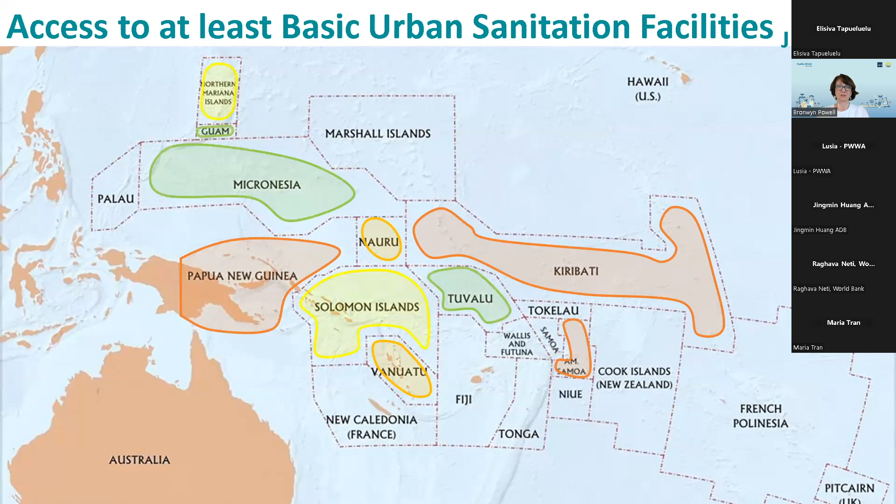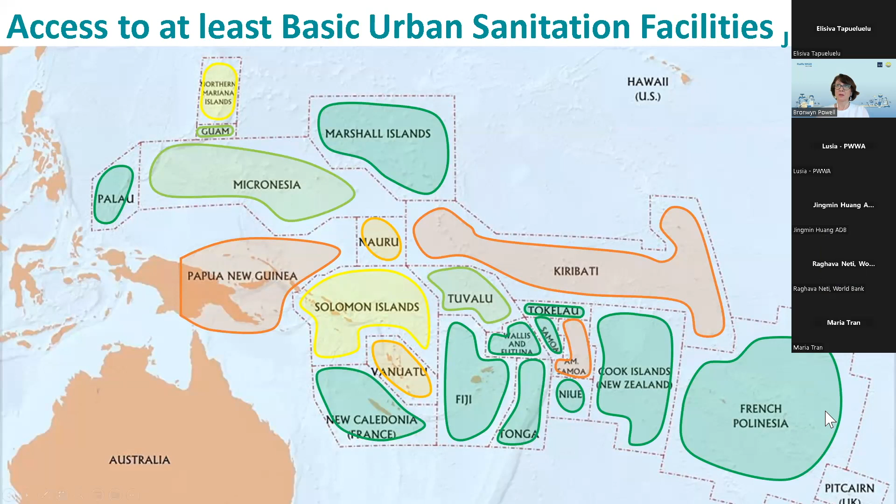In terms of how urban sanitation is looking across the Pacific, there are 3 countries with very low access to basic sanitation, only 49 to 60%. Then we see improvements as we move across the Pacific. I should acknowledge Mark Ellery and thank him for this slide, a graphical representation of access that's very useful. You can see certain countries are further behind than others when it comes to access to basic urban sanitation.

This is represented again in this graph, which shows access to safely managed sanitation, basic sanitation, limited and unimproved, as well as open defecation. Just to note, these are urban figures, and in some countries we don't have urban figures, just national figures, indicated by the N next to the country name.

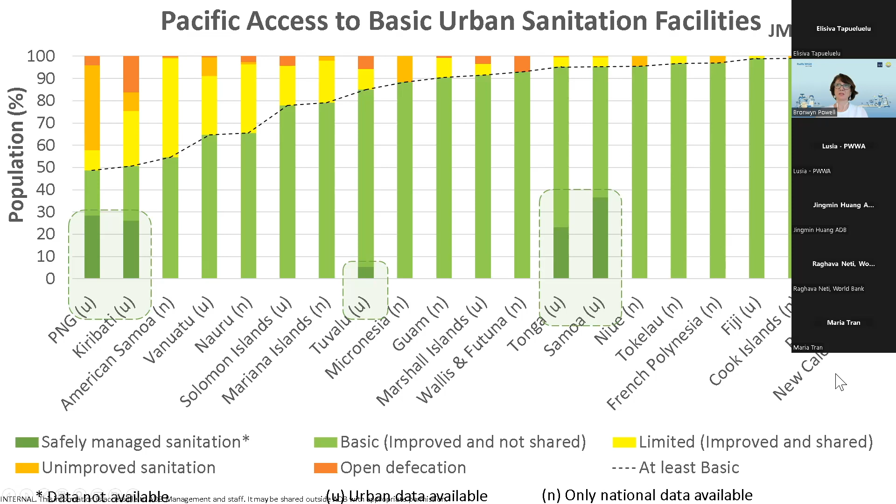Worth noting as well, SDG 6 has since been adopted, setting a higher target than before - not just basic sanitation access, but safely managed sanitation. So far only 5 countries in the Pacific are measuring whether the basic access that exists is safely managed. We can see that in Tonga and Samoa, although basic access is high, the safe management of that basic sanitation is still fairly low, under 40% for both.

Some of you are very familiar with sanitation, maybe others less so, and it's always worth recapping what we mean by the sanitation service ladder, which is the JMP definition by which countries' access is measured. Basic service is use of improved facilities that are not shared with other households, but safely managed means that waste collected is stored safely and is transported or treated safely, either on-site or off-site. There are different ways that can happen.

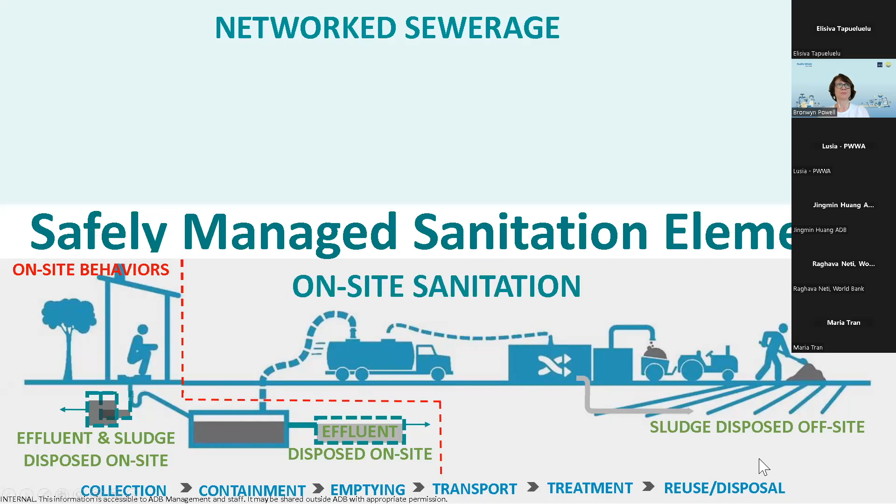So we know that means they're responsible, and there's often a delineation of responsibilities between what happens on-site and off-site. This is where interaction between utilities and householders occurs. Here you can see a pit latrine where effluent and sludge is disposed on-site, a septic system with a holding tank and soakaway where effluent is disposed on-site, and the fecal waste or sludge is transported and disposed off-site. In terms of sewage, the on-site behaviour relates to the toilet, and everything is flushed and treated, so the effluent and sludge is disposed off-site. We'll hear an example from Samoa of that system.

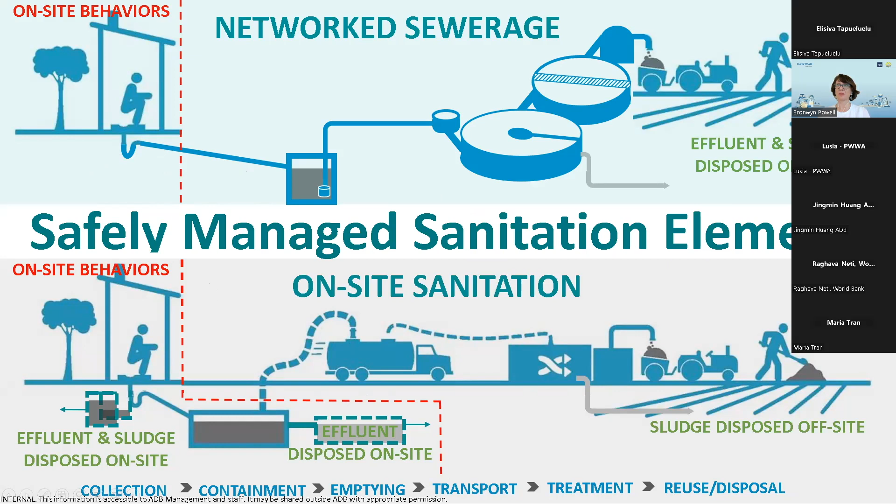Some considerations for on-site sanitary behaviours: the sanitation choice. In many countries there's already high levels of basic access, so people have made a choice, and urban planners have helped make that choice for them around what kind of technology option they are using. In other countries there are big gaps in access still, so important discussions need to be had about what kind of systems, whether on-site or sewage systems, should be adopted to service those areas. That relates to what kind of emptying and transport services are available, what supply chains exist, and the affordability of those different systems.

Health is a very important consideration, and the foundational reason, and Mark will go into the links between sanitation, acute and chronic health issues, and stunting.

Cleanliness and hygiene matter a lot when it comes to on-site sanitation behaviours, how people use their toilets. Safety and accessibility for all ages and genders matters, and in the Pacific particularly, the location and accessibility of those toilets has a lot of cultural implications, which we need to consider when building and designing toilets.

In terms of service sustainability, some of the issues we'll hear about today that matter particularly for utilities are around preventing blockages, ensuring ongoing functionality, and minimising the risk of overflow to surface. This is where we see a big health risk and risk of contamination, and the fecal-oral connection, where health impacts appear. Then also for utilities, costs and options for safe disposal are critical.

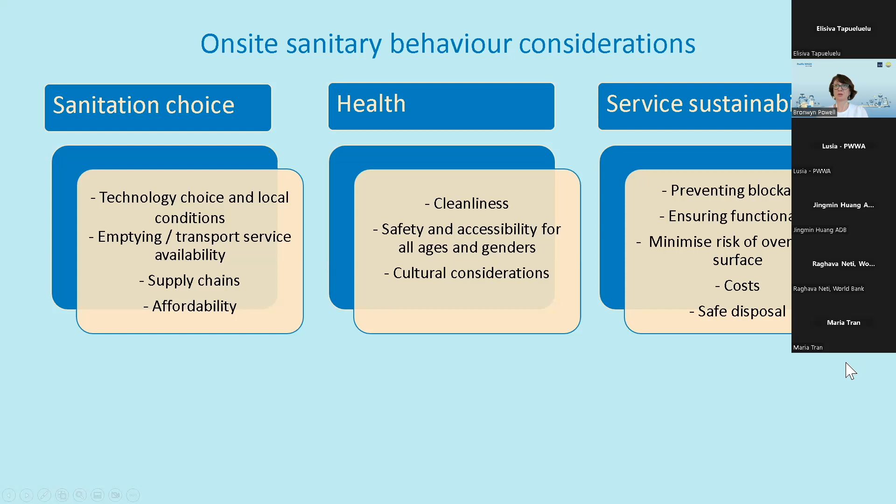So in our webinar today, we'll consider what the principles of wastewater treatment are for a good enough sanitation option, where household and utility responsibilities start and end. I think it would be interesting to discuss that in our Q&A session. And then approaches to influence household behaviours.

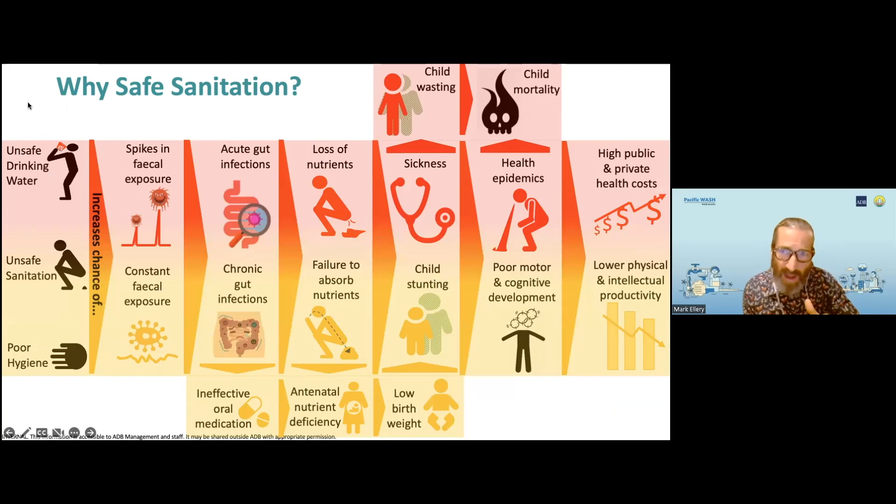While the acute consequences of poor sanitation are quite well known, and exposure to bad sanitation increases the risk of acute gut infections, diarrhea, vomiting, low weight for height in children or high incidence of wasting, increasing the risk of child mortality that's borne as costs in the public health system.

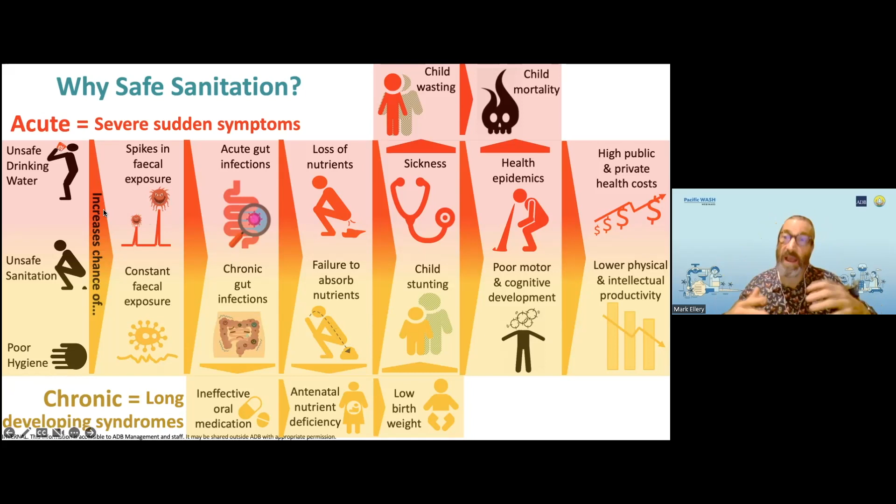What's less well known is the chronic implications of constant exposure to fecal waste, or constant fecal ingestion, that leads to colonization of the lower intestine with fecal bacteria, reducing the absorption of nutrients, inhibiting the growth of children, increasing the risk of stunting that leads to poor physical and mental development in children and adults, and as a consequence places limits on the development and the failure of individuals and countries to reach their full potential.

So the introduction of sewers in Europe, and then later sanitary conditions in Japan and South Korea, have been associated with long-term changes in the height of men, even though they were initially intended to address acute consequences. They had knock-on benefits in addressing some of the chronic consequences of fecal exposure.

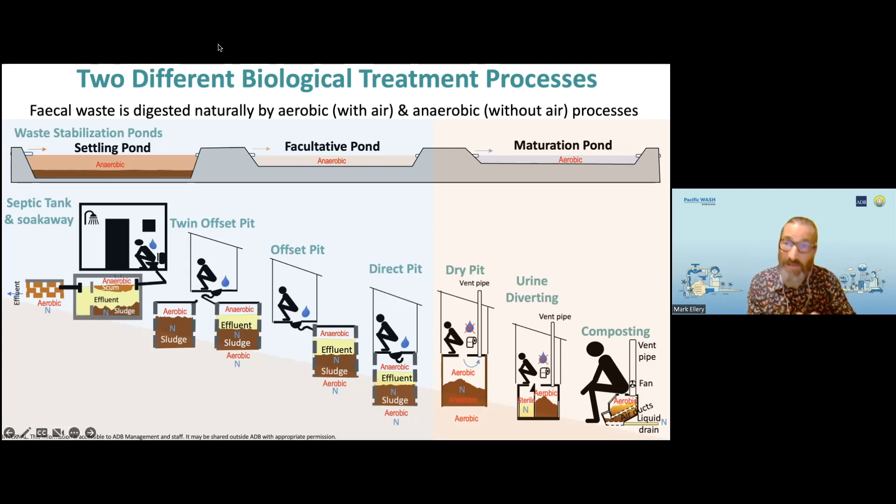So in understanding, ultimately, we really want to understand at what point does the fecal waste that is being contained on site, or transported and treated off-site, become safely contained and safely treated.

We know that aerobic processes are more efficient in the removal of pathogens, neutralizing pathogens much more efficiently. Aerobic processes are much more effective in liquid that doesn't have solids, and solids that don't have liquids, because it's much easier for aerobic organisms to penetrate liquid when there are not solids floating in it, where fecal bacteria can hide. Similarly, when sludge is wet, it's very difficult for aerobic bacteria to penetrate it compared to dry sludge.

So aerobic processes are much more efficient when liquid is clear and when sludge is dry. And so while there are multiple technology options in the Pacific, with sanitation behaviors associated with all four sanitation technology options, today I'm going to focus on what we're learning regarding cesspit toilets, as well as septic tanks and soakaways.

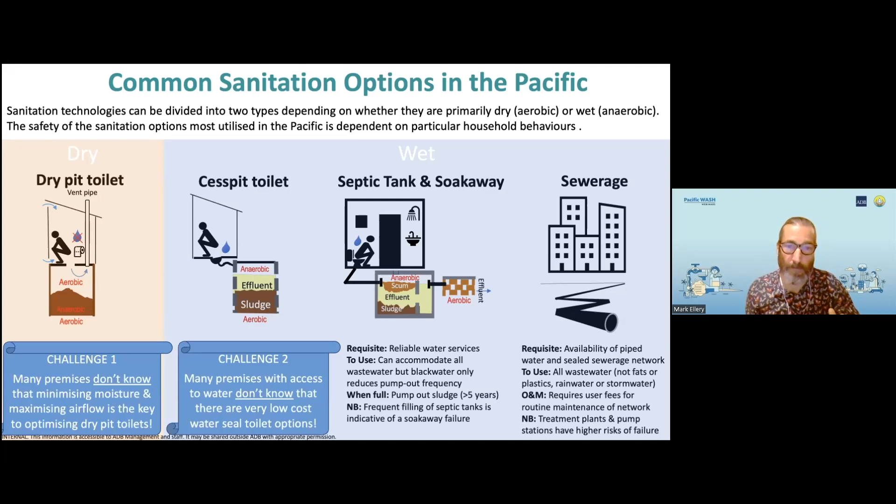In understanding septic tank and soakaway performance, I think probably the most important thing to understand is that the anaerobic conditions that exist in septic tanks are not very efficient in the removal of pathogens or nutrients. Most of the pathogen or phosphorus removal occurs underneath the biofilm, in the aerobic zone underneath the biofilm.

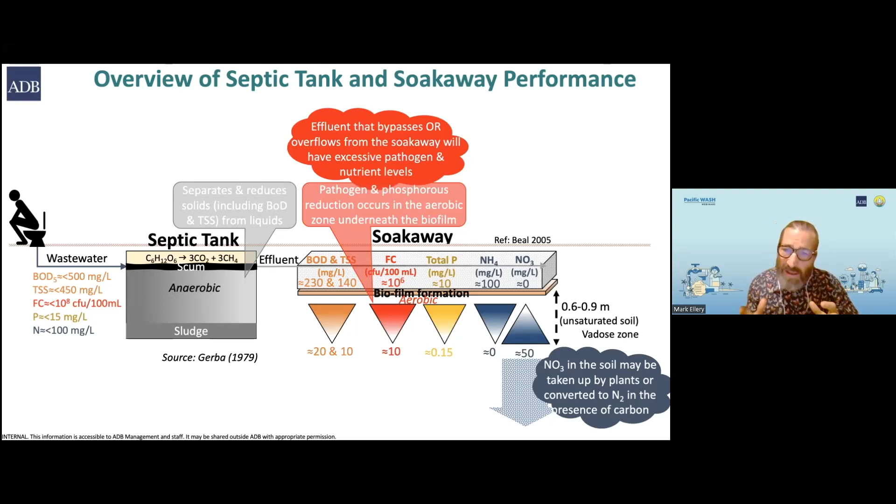While nitrogen will leach through and penetrate underneath the soakaway, there are opportunities for uptake of that nitrogen from plants or through exposure to carbon in anoxic conditions in the soil.

Probably the important thing is that effluent that bypasses the soakaway will always have excessive pathogen and nutrient content, excessive levels of pathogens and nutrients.

Methane that is discharged through the soakaway, most of that will be converted to CO2 within the soil, and so it reduces the overall carbon footprint. So there's an additional benefit of the soakaway in terms of its effect on global warming.

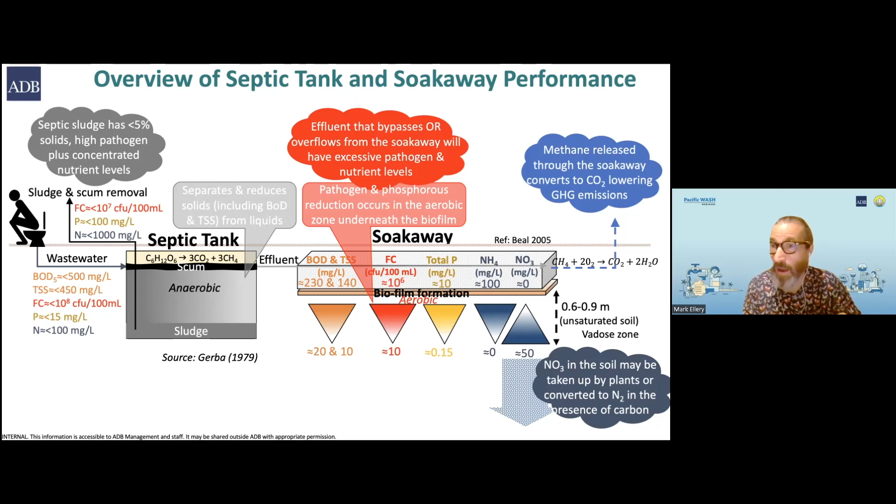I think finally, probably the other characteristic worth noting from a septic tank is that it will concentrate the nitrogen within the tank. So when we remove the septic sludge, it will generally have fairly low solids content, but high nutrient levels.

So what's happening - we're trying to look at the processes happening underneath the soakaway, recognizing the importance of the soakaway or pit. It's really looking at how the interaction with the soil and the effectiveness of the soil affects removal of the various pathogens.

Critical in the performance of the soakaway or pit is the establishment of a biofilm, a black layer of gooey film bacteria that establishes underneath the pit. That slows down the migration of effluent through the soil and reduces the effluent absorption potential, but is extremely important in attenuating pathogens.

Firstly, it's the parasites, which are the largest, that are first to be attenuated, and they last the longest, but they move the least. Second is the fecal bacteria - bacteria within the fecal matter are the second to be attenuated, and they're attenuated by the aerobic organisms that hunt below the biofilm.

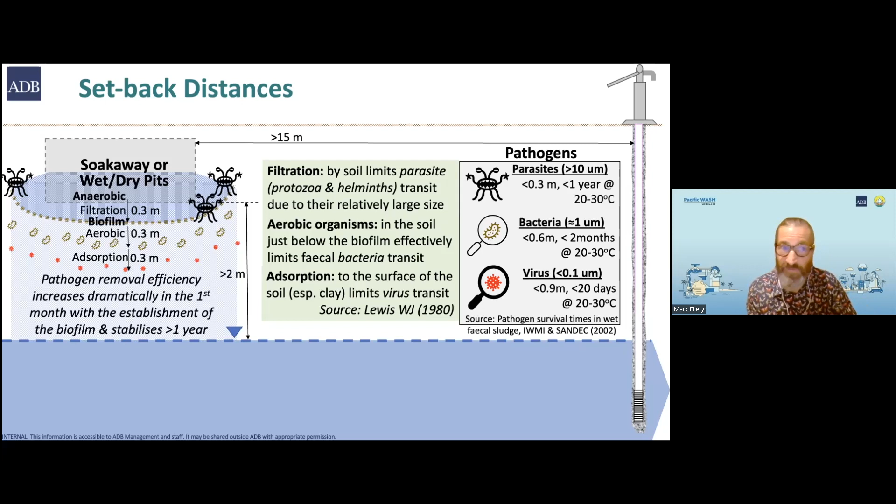The third is the viruses, which are the smallest and most likely to migrate, but they survive the least amount of time. So in summary, in roughly the first one meter of soil, all of your parasites, bacteria, and viruses will be attenuated.

The risk pathogens pose is dependent on both their survival time and their ability to migrate. In the Pacific, we have quite favorable conditions to reduce survival time - high ambient temperatures, in many conditions drier soil close to the surface, and soil rich in microflora. Those conditions are conducive to reducing pathogen survival times, so the survival times often will be shorter in the Pacific.

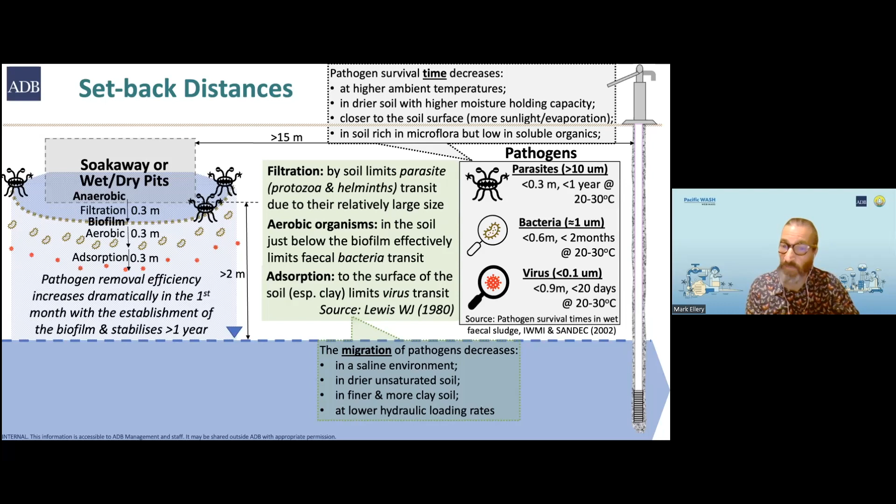Migration distances will also typically be a little less because we often have saline environments, drier unsaturated soils, and therefore we can potentially manage. Often we have lower hydraulic loading rates because our systems separate grey water and black water.

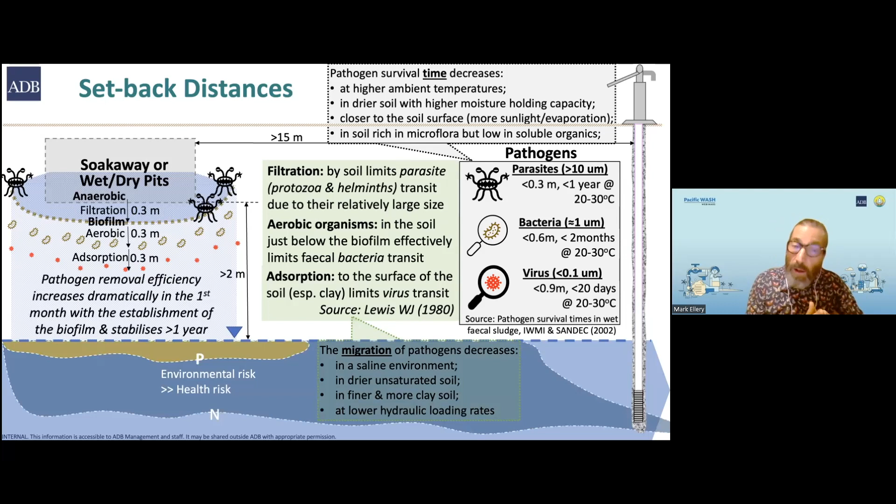While phosphorus may get through and nitrogen will routinely be transferred through the soil, they are posing primarily an environmental risk rather than a health risk, particularly at some of the densities we're concerned with.

In dealing with our horizontal setback distances, we're really worried about migration time, which is dependent on the underground velocities of the groundwater. Typically in the Pacific we have very, very low lateral groundwater velocities. So if we're dealing with 20 days transfer time of pathogens, and our lateral velocities are in the order of tens or less than 10 millimeters per day, the travel time for the lateral travel setback distances will actually be much shorter than the guidelines used for advocacy for technology options.

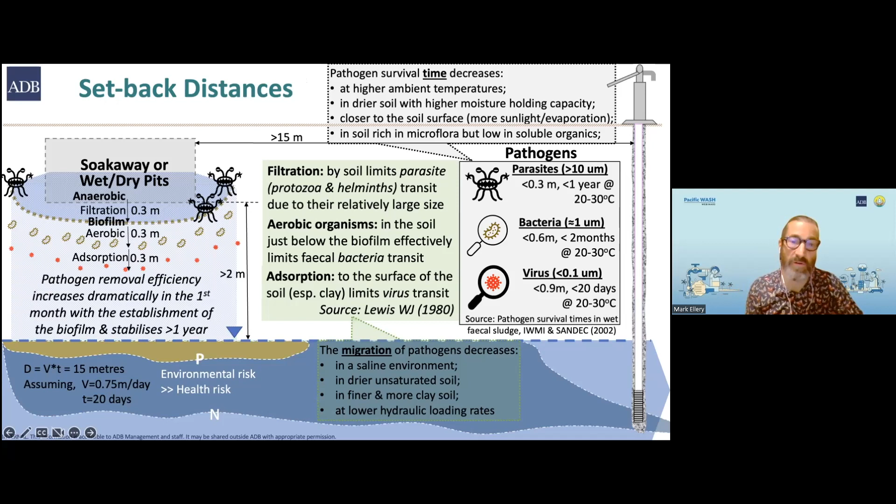When looking at the soil conditions, the actual differences between septic tanks with soakaways versus cesspits are not as great as we would first imagine, because in essence both rely on the soil absorption system rather than the anaerobic tank. It's really the soil system that they both rely on, and when you look at it like this, they're quite similar. There are a couple of critical differences.

With cesspits, one critical difference is that they fill up much slower than septic tanks because they run at much higher densities. We often struggle to understand why cesspits take so long to fill up, and it's because they're naturally leaching systems.

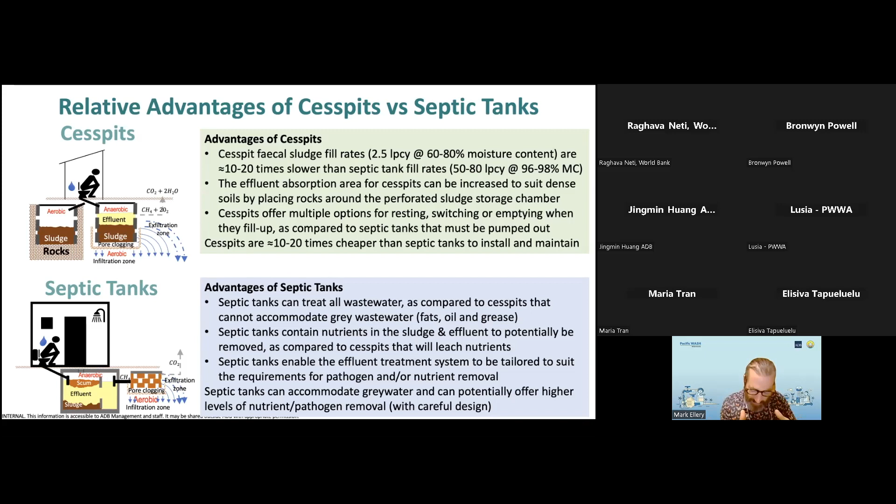We've learned from dwellers in informal settlements around Honiara and other places in the Pacific that when dealing with very dense soil, you can enhance absorption capacity by placing rocks around your pits, enabling cesspits to accommodate very difficult and challenging soil conditions.

With cesspits, we also have options for emptying where trucks can't access, by switching pits, alternating pits, and pairing pits together in different ways. They're also a much cheaper option than septic tanks.

However, cesspits can't deal with fats, oils, and grease. If you imagine a cesspit where grease comes in, it will seal the sides of the pit, and the pit will no longer function if fats, oils, or grease from the kitchen or bathroom come into it. It just blocks the absorption capacity of your pit.

Unlike a septic tank, which is designed to deal with fats, oils, and grease. The T-pieces are designed so you can still draw gas through into the soakaway, and get the effluent into the soakaway, but it keeps the fats out of the soakaway.

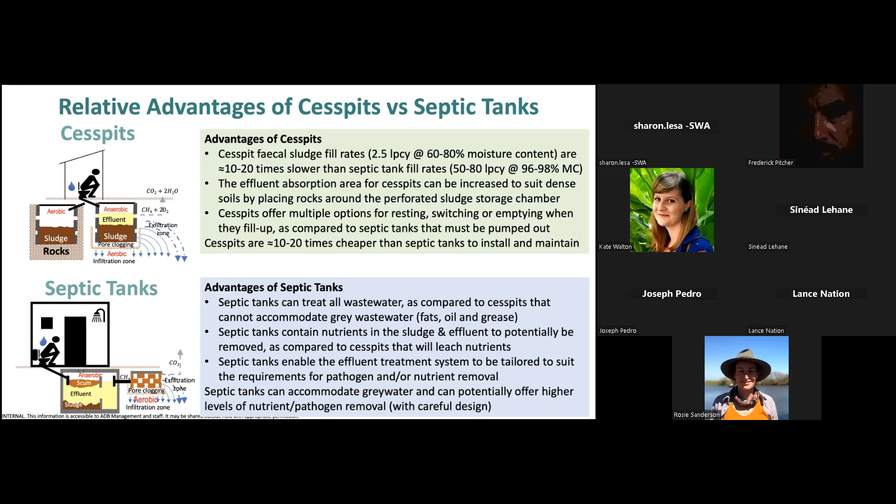Septic tanks offer some other options for segmenting and enabling the removal of nutrients, and they also enable you to do some other fancy things, like being black water only. But the key difference that sets the septic tank apart from the cesspit is that it can handle fats, oils, and greases where cesspits can't.

This is an important consideration in the Pacific, because Pacific plumbing typically separates black water and grey water, unlike many countries in the world. So we're able to have this conversation, especially in urban areas, about the shifts and comparative trade-offs between cesspits and septic tanks.

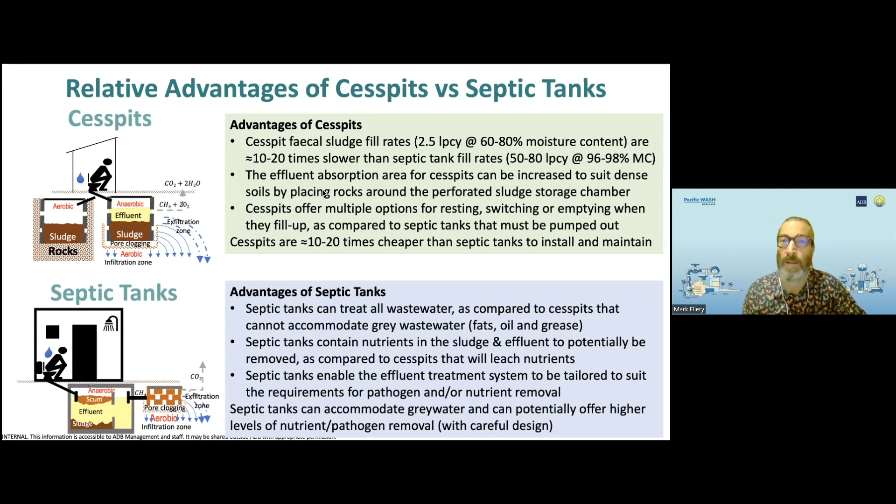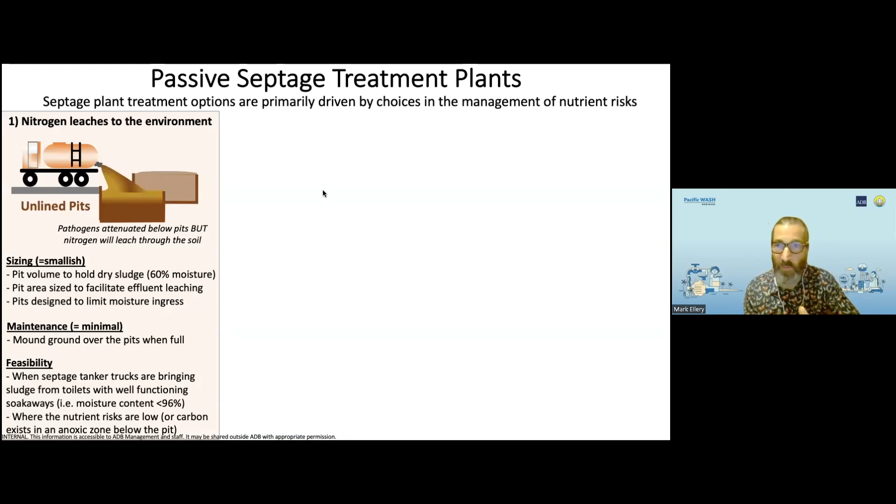Thanks, Sinead. So finally, when we empty cesspits or septic tanks and transport the waste to a disposal site, the disposal sites are often quite technologically complicated, but we can actually simplify down the technology options.

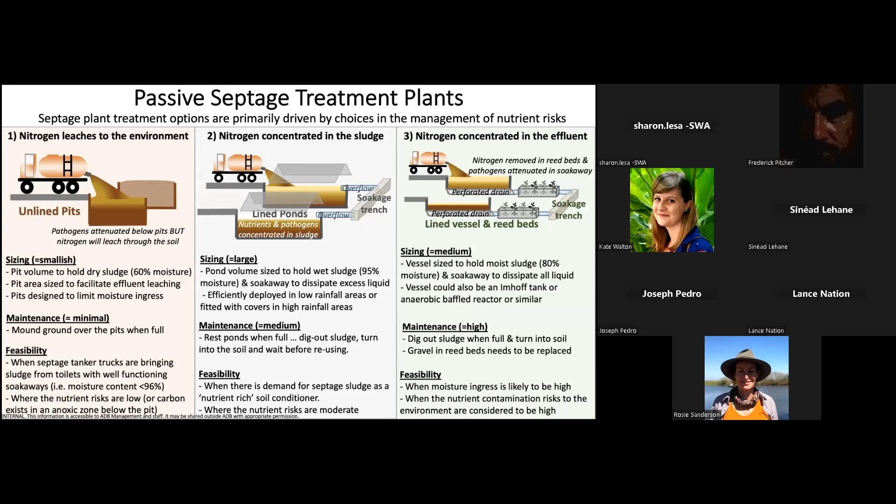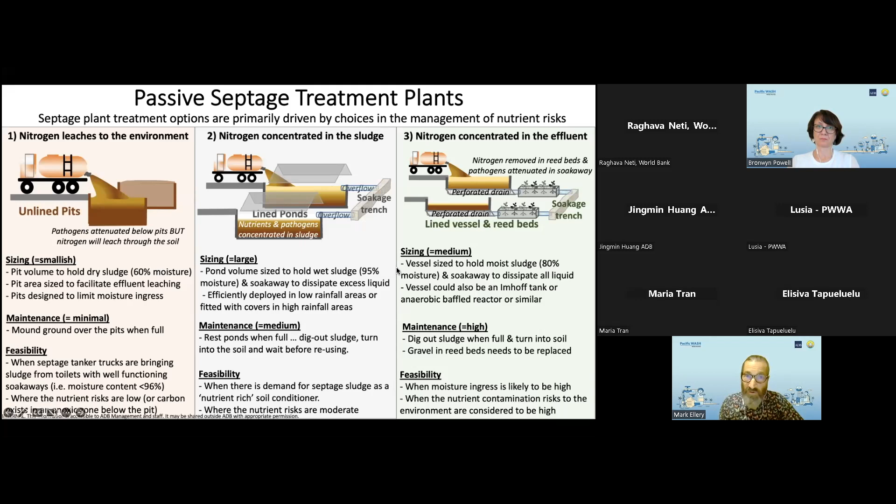We can design our treatment system to leach nutrients into the environment, or secondly to concentrate nutrients, nitrogen, in the sludge, or thirdly to concentrate nitrogen into the effluent. Those three trade-offs basically define our different options for septage treatment, enabling us to make trade-offs in terms of the technologies we want to apply. Thank you.

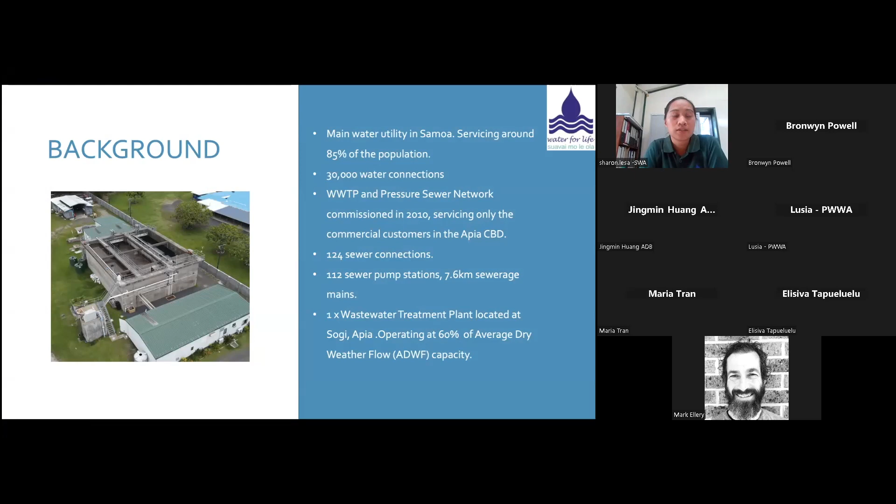SWA is the main water utility in Samoa. At the moment, we're only servicing around 85% of the population. The other 15% is under independent water schemes, where villages take care of their own water sources. We're nearing around 30,000 metered water connections, and we only have one wastewater treatment plant, located at Sogi in the Apia CBD.

The treatment plant and pressure sewer network was commissioned in 2010, so it's relatively new. We have around 124 sewer connections, 112 pump stations, and 7.6 kilometers of sewage mains. The treatment plant is only operating at 60% of its average dry weather flow capacity, so it's not yet at full capacity.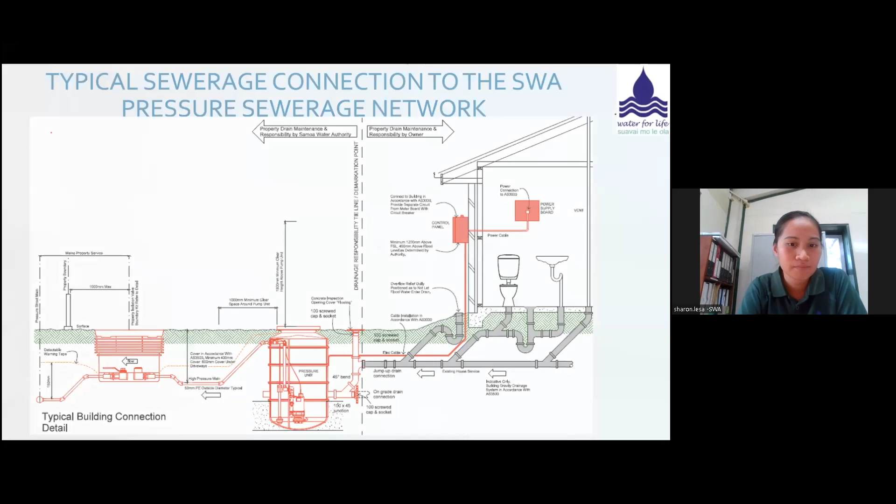Some of the regulations we have in place to control what can be discharged into our system include the sewage and wastewater regulation. This states that SWA is only mandated to connect commercial customers in the Apia CBD, and that if you're a commercial property with a sewer line available in front of your property, you need to connect to the SWA network. We also use our SWA trade waste policy to control what can be discharged into our pump stations, including whether a customer needs pre-treatment like a grease trap before they can use our pump station.

For our wastewater treatment plant, the effluent being treated has to comply with SPREP regulatory standards, but we're also preparing for the rollout of our own national effluent discharge standards. There's work to do there, because we need to make sure the treated effluent will meet the new limits stated in the national guideline. For our customers, we always make sure they're aware of their responsibilities as stated in the regulation and the trade waste policy before they sign the pressure sewer installation agreement and the customer agreement.

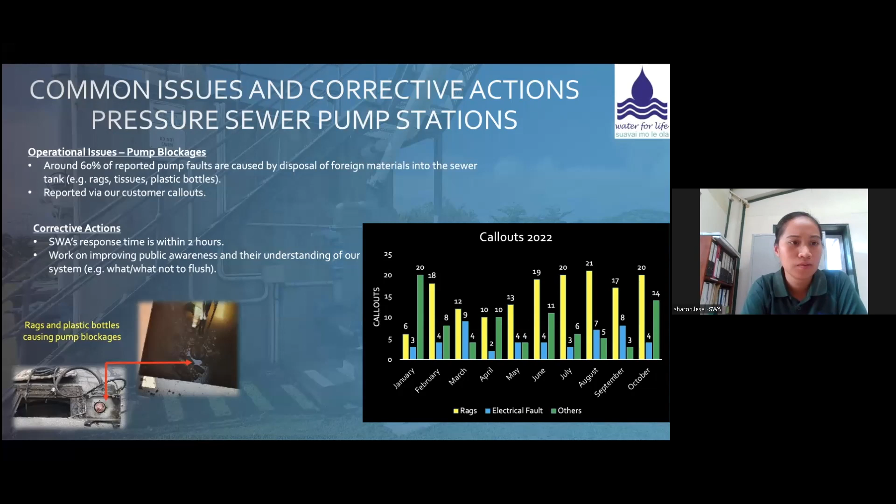From our point of view, this is one of the biggest issues we have, especially with commercial customers who have restaurants - they tend to violate a lot of the SWA trade waste policy. In some instances, we issue warning letters, telling the customer they need to clean up their pre-treatment or their grease trap. There was only one severe case, from last year, where someone was pumping seawater.

We had to issue the whole cost recovery and also upgrade the pump station. But the problem is that SWA isn't very strict on enforcing the rules stated in the trade waste policy, so we tend to bear the consequences sometimes because we have to clean up the pump station if the customer doesn't do their part.

The other biggest issue we found from operating our system is that there's a lot of indirect, and sometimes direct, stormwater discharge, which the regulation clearly states should not be connected to the pump station. But this can be an issue. We are working on it at the moment to reduce or identify the points of high inflow and infiltration.

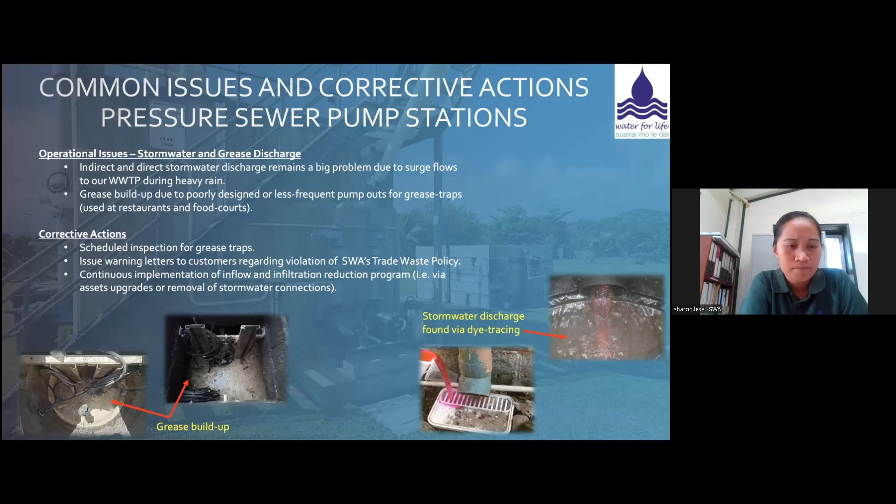Yeah, that's the next slide, please.

Some of the work we're doing at the moment is to maintain our assets and keep them functioning for the next few years. As you can see in those photos, we do annual maintenance on our pump stations, to make sure they last longer and reach the end of their lifespan.

Some of the other things we're rolling out are our SCADA and telemetry units. This is basically for us to be more proactive with our customer response time, and it also helps us do some remote monitoring and controls.

At the moment we have an increasing number of pump stations being installed, so we also get a wider complexity of issues. We have to upskill our staff on an annual basis, or when there's a need, keeping them trained so they can deal with the new issues that come with operating a pressure sewer system.

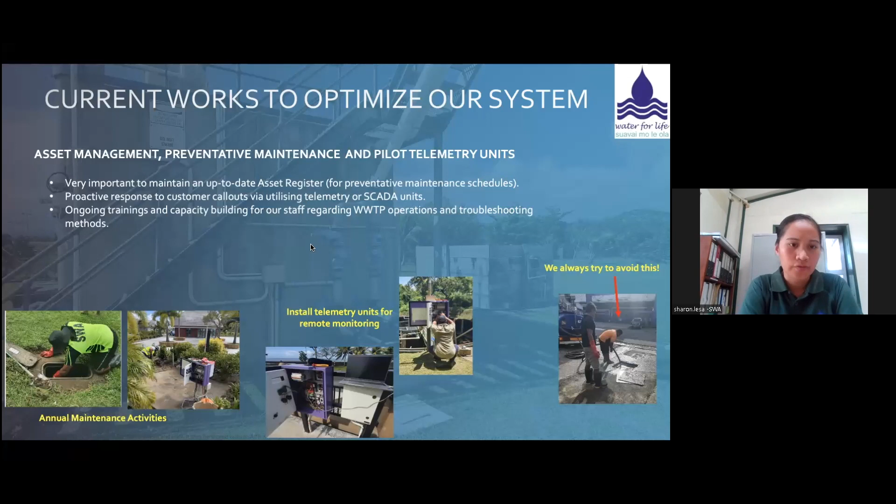Okay, yeah, that's it for that slide.

This is also one of the biggest things we're working on, because our system in Apia is completely pressurized - we don't have any sewer gravity mains. So operating 112 pump stations can get very expensive because of the electricity bill.

SWA's current work has to do with optimization, a lot to do with flow controls and smart control panels. Basically what we try to do is identify the times when the pumps can be operated so they're not all pumping against each other. Because if all the pump stations operate at one time, not only does their efficiency go down, but the electricity bill goes through the roof.

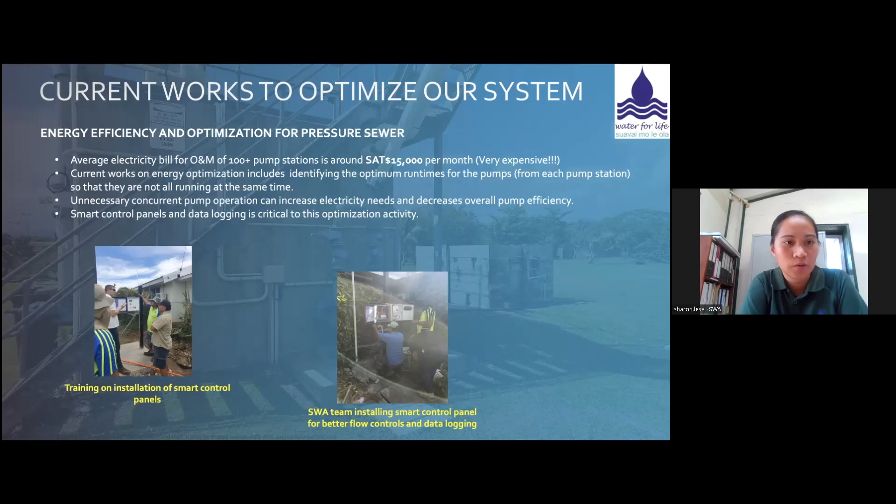That's just some of the ongoing work we have. The main goal is that we need to optimize the system we have before we can increase the network and also increase the number of pump stations. If we do want to connect domestic households in the future, we need to make sure we have complete control of the one we're running at the moment.

So that's the behavioral changes and also from our end.

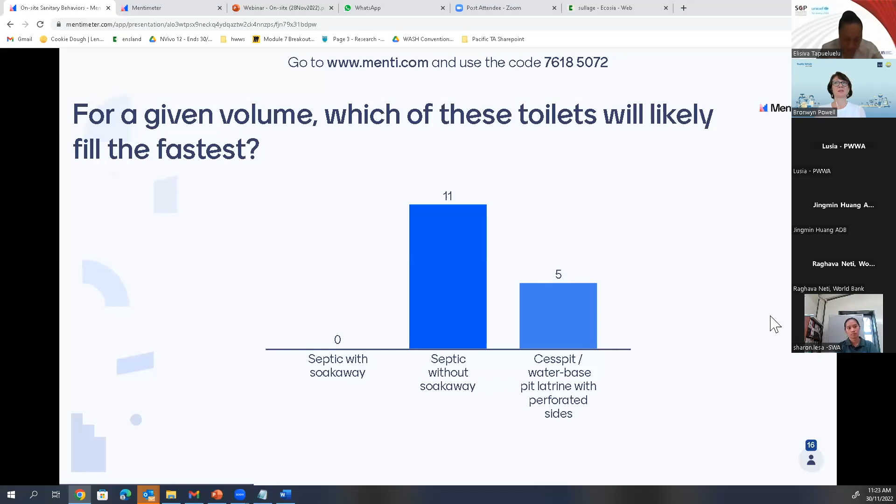I guess we're quite interested, in terms of the systems we're talking about today, we are looking at the whole range from sewered through to completely on-site household management. So it'll be interesting to know, and hopefully in our training next year we'll have a chance to explore and find out which countries, because as we've seen today, the situation is so vastly different across different Pacific Island countries, which technologies are working well where is also what we're interested in exploring more.

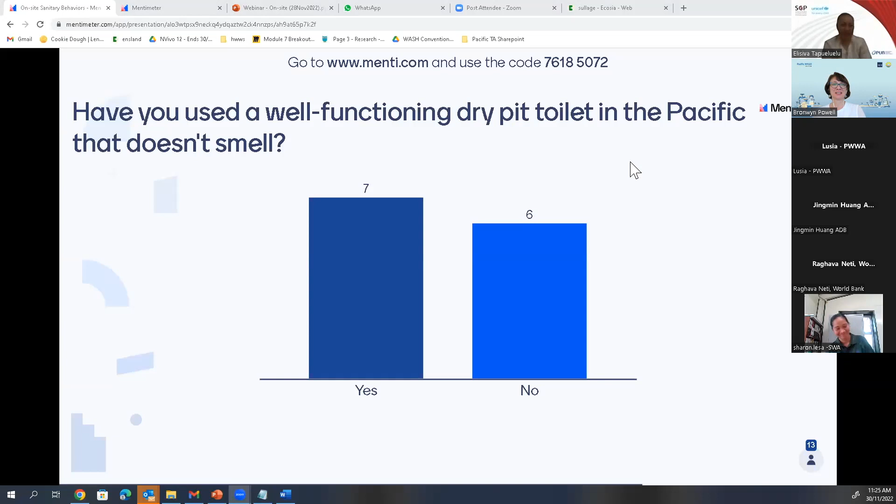What's the comment here from Rosie? For odor consideration, the brown carbon heavy materials that are added can make a difference. Yes, so helping the aerobic digestion process by adding carbon. Good point.

And what's this? 'CT, too expensive to buy and install.' Do you mean the septic tank's too expensive to buy and install for CT? You can unmute, or maybe clarify in the chat.